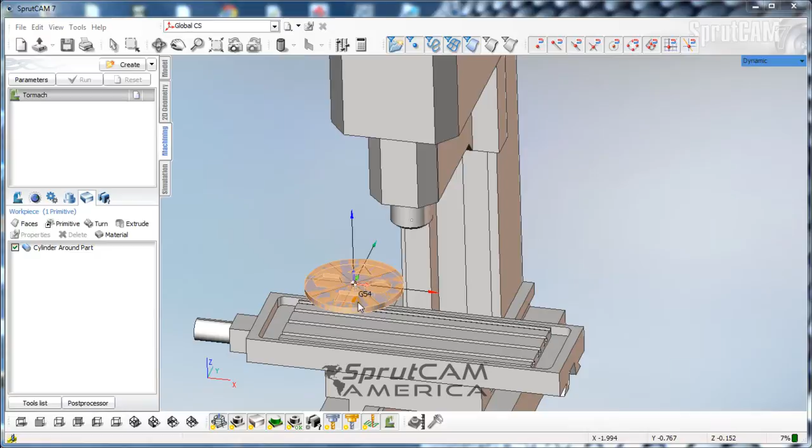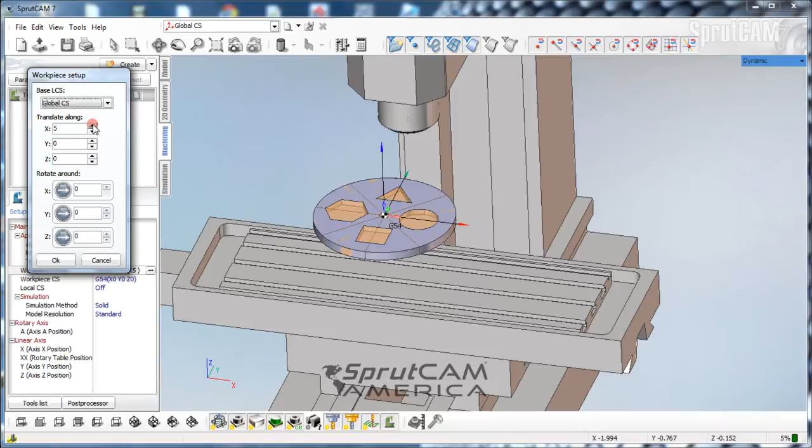As you can see, I have imported this disc. It's about 12 inches in diameter, 3/4 inches thick. And what I'm going to do is make it go down on the table here, move it over a little bit. So I'm going to click on this setup icon right here, and I'm going to click on workpiece setup, these 3 little dots, and I'm going to move it 5 inches in X and minus 5 inches in Z.

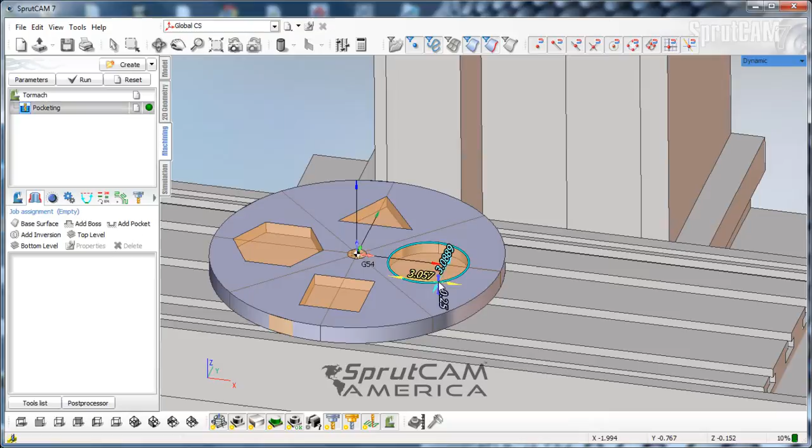Click OK. Now it's more or less on the bottom, and the first pocket we're going to do is this circular pocket. So what I am going to do here is create a roughing pocketing procedure. I'm going to turn on my edge selection tool, go into my job assignment, double click on the edges, find the tangent edges, and I'm going to click add a pocket.

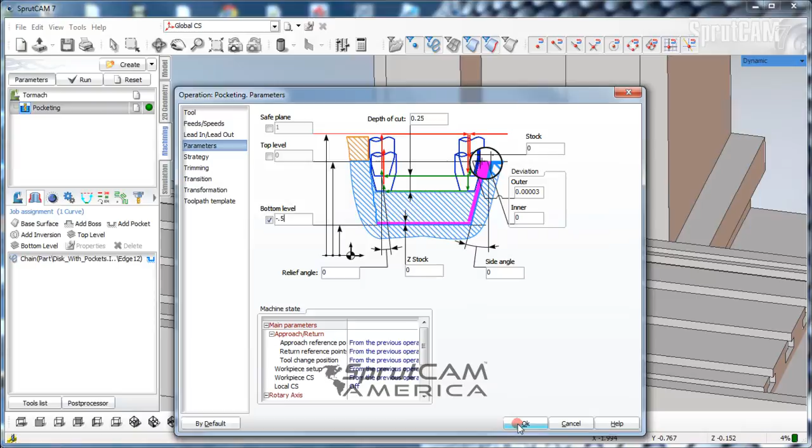I'm going to double click pocketing, and I'm going to make this a 1/4 inch diameter tool that's 2 inches long. And over in parameters, I'm going to take the relief angle off and make my bottom level -0.5. That's all we're going to do as far as parameters are concerned. We're not really worried about that stuff. You guys should have that down by now.

So now what we're going to do is run it and make sure that it gives us the right pocket. And that looks pretty good. So let's do a simulation. Good, very nice. Okay. Now here's where some of the tricky stuff gets in. In order to get this to post out correctly, we're going to have to do an auxiliary operation.

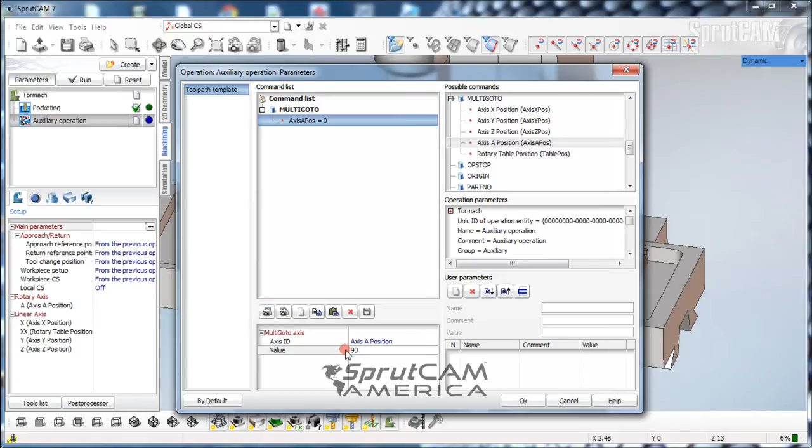So we're going to create an auxiliary operation. We're going to double click in there, and we are going to pick multi-go-to over here. Multi-go-to is a positional command. So we're going to double click that, and it gives us a multi-go-to. Then we got to click the plus, and we want to do the A position. So we are going to click A position 0. Now we'll go down to this multi-go-to axis. It's a value, and we're going to put 90 degrees in there and hit OK.

And now we're going to create another pocketing operation. So we can just right click on pocketing, click copy, then right click on auxiliary operation, click paste, and we have pocketing 2. Now we're going to do this pocket for pocketing 2, so we need to index this over there. And how we're going to do that is go back to our setup icon, find our workpiece setup, click those 3 dots. We're going to pick global CS, and it kind of messes everything up a little bit here, but we're going to move it over 3 in X and down 5 in Z.

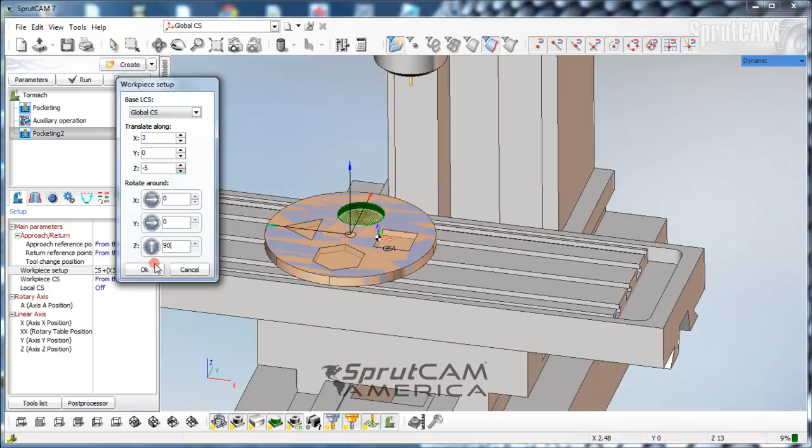5 in Z, and we're going to rotate it around the Z axis 90 degrees. Oh, I think it's being a little goofy. And we clicked OK. So we're over in X 3, down in Z 5 inches, and now that square is 90 degrees. So we're going to pick our job assignment and pick the 4 edges of the square, click Add a Pocket, and click Run.

Alright, now we got to make another auxiliary operation. So we're going to create an auxiliary operation. Go back to multi-go-to, double click, open the plus, click on A position, and make it 180 degrees. We got that. Now we're going to right click on auxiliary operation and paste. Now we got pocketing 3.

In actuality, let's delete that. And let's copy pocketing 2. So we'll copy it and paste that. Okay. And now we're going to go back to workpiece setup right here. Click the 3 dots. And we're going to change this Z to 180. Click OK. And now we're going to go to our job assignment.

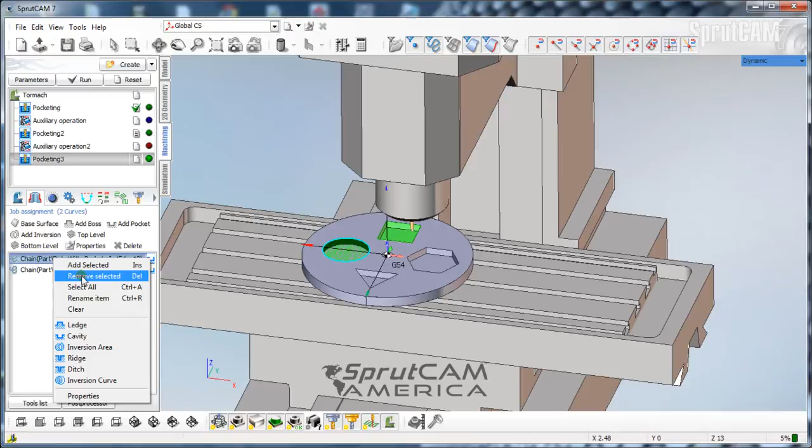And we are going to clear that box out. Well, I think we have to go back and do that here. Yeah, we have that box in there still, so we're going to remove that circle. Okay. Now we'll go down here, pick our job assignment, and we will pick all the edges of this pocket. Click Add a Pocket.

And now we have to do it one more time. So we are going to create an auxiliary operation. Double click it. Go to multi-go-to again. Double click, plus A position 270. Click OK. And we will now copy and paste for pocketing 4.

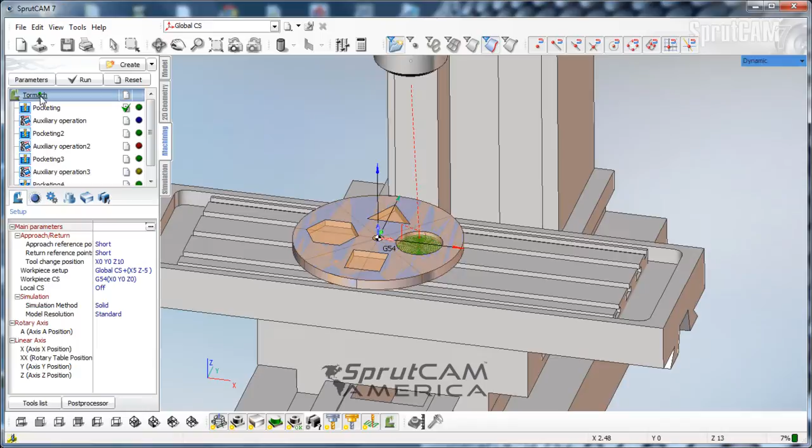Go to the job assignment, clear that out, and go to our setup. Click the 3 buttons on workpiece setup, move this to 70, click OK, click our job assignment, hold down Control and pick the 3 lines of the triangle pocket, click Add a Pocket, and now we can go up to the top, click Reset and Run for all the things.

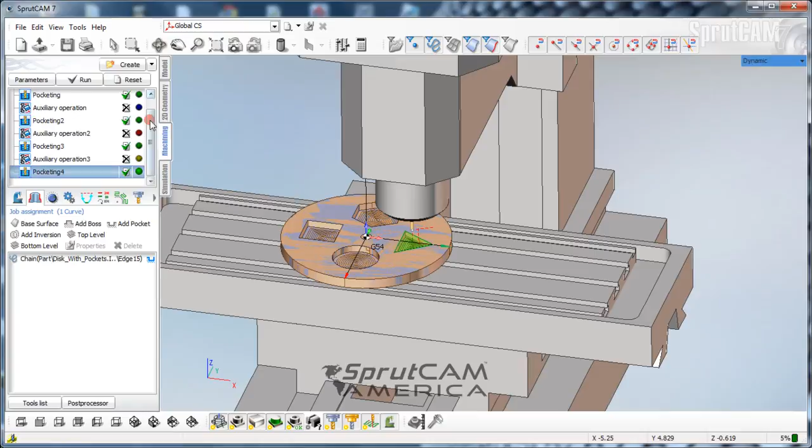Now once we've run that once, there's kind of a strange thing we have to do a little bit, and that's we have to go and disable all the auxiliary operations. Then we'll go back up to the top, click Reset and Run. Let this all go through its setup there.

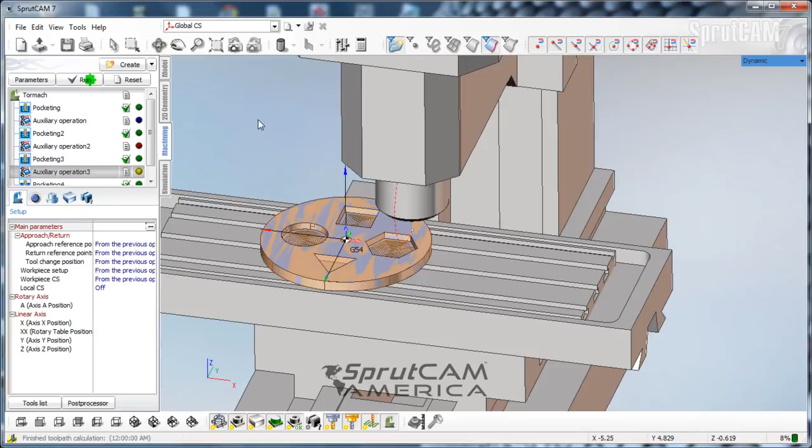Okay, now we're going to enable all the auxiliary operations. We do that by double clicking on the little page here, and we will run each one of those separately. Now we can go to our simulation page. We'll go up to the top, reset our workpiece, and click play. Now it should come down, do the circular pocket,

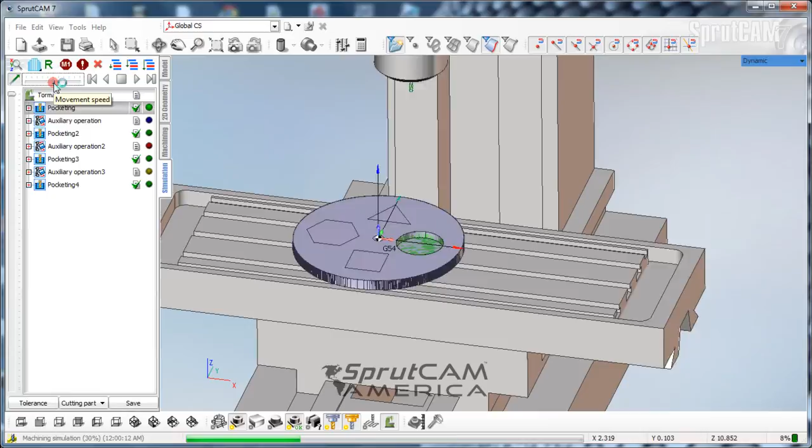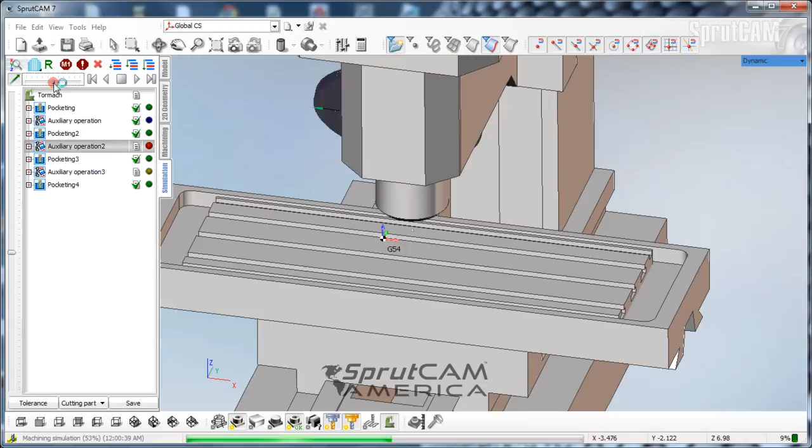all right, and you see that little clip frame? That's because it thinks like it's going to be using a standard A-axis, but we're kind of stifling that. We're making that go away. So it does the initial move, but then it goes right back to where it was supposed to go for the milling. So yeah, it's a little bit of a strange operation, but it's getting us what we want as far as indexing these pockets.

In the last pocket, I'll do the same type of thing. Up and around again. Boom. There it is. And this is because this is not the standard way of recognizing an A-axis.

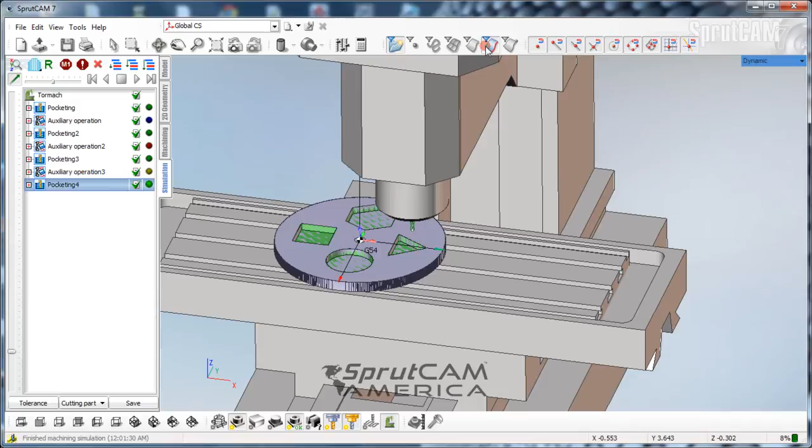Okay, now that we've seen that, we have to post it. Oh. Have to rerun all those here. And that's why we got to disable auxiliary operations, reset, run it again. Without those auxiliary operations, when we go to post it later, it will not post those movements that we need to index.

So now we'll go to post processor, and I'm going to pick just our regular post for a Tormach machine, which is a PCNC Master Post Rev 1.5, and we'll click run. Okay. All right, now here's our first tool all the way through. I'm gonna zoom through this as fast as I can till the next pocketing procedure, which is right here, and you'll see this A90.